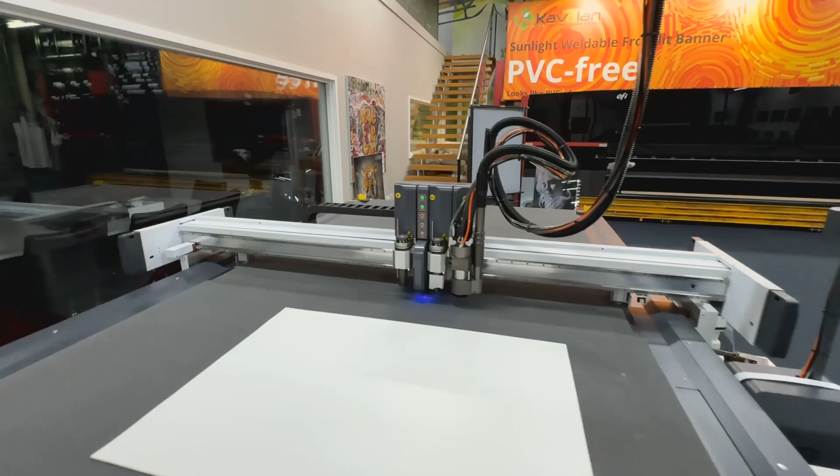So in this video we're going to run a cut job without registration marks using our UCT tool on our JWEI JCut Cutter. So the very first thing that I need to do is ensure that I have got my UCT tool in the K position, which I have. I've also identified that I've got the correct blade in there, which I've got the J311-1, and it's obviously sharp and it hasn't been broken or anything. I've identified as well that it is the correct blade for this type of material, and this is just like

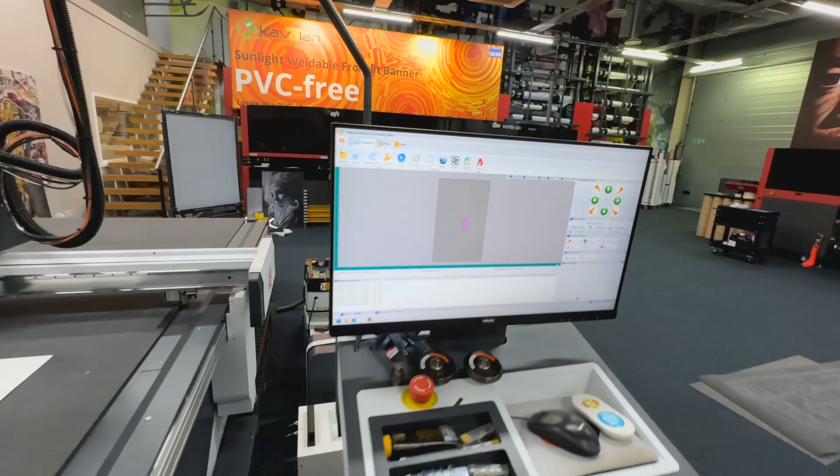a cardboard. Now the next thing I need to do is I need to do the tool depth on that tool, and I also need to do my vacuum zones. So I'm going to go into JWEI. I'm going to go down to the tool depth there. I'm going to ensure that I've got the correct tool. Now you'll see that I've only got knife and router, and that's because I currently also have a V-cut tool set up in position K1, and the V-cut tool does not use the automatic height detection pads on the table, so it doesn't give us the option for the tool height.

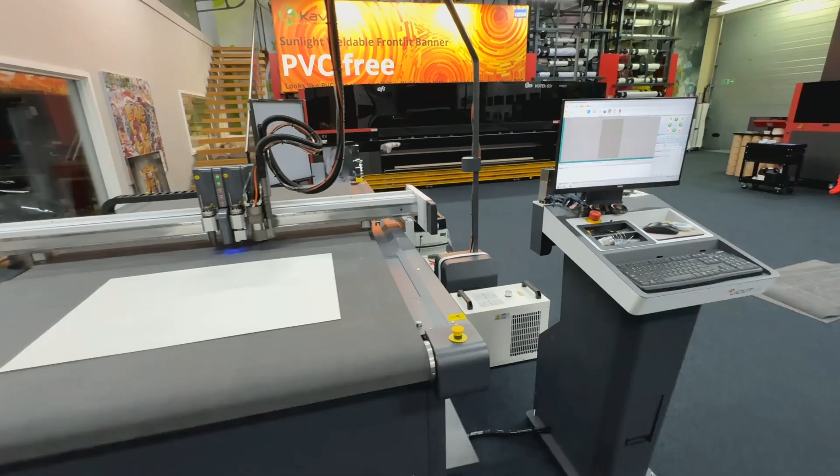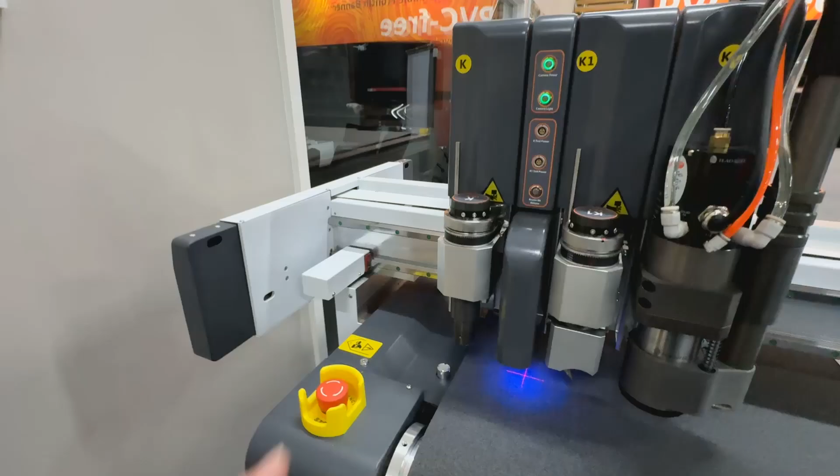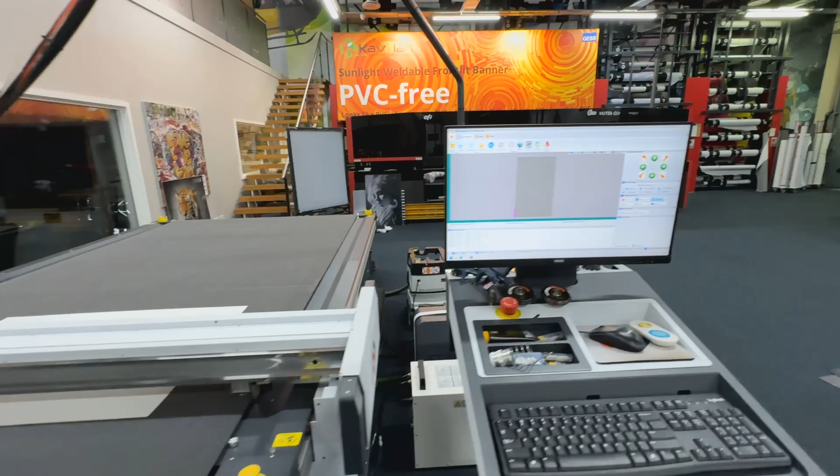So I'm going to click on tool depth button. That's then going to move my head over to the tool depth, and it's going to do the tool height for me. Now the K position will always do its tool depth on this one over here. It will not use that one. So K will always use this, K1 and K2, or the router will use this one. Now I've done that, I'm just going to move the head back again using the arrow keys.

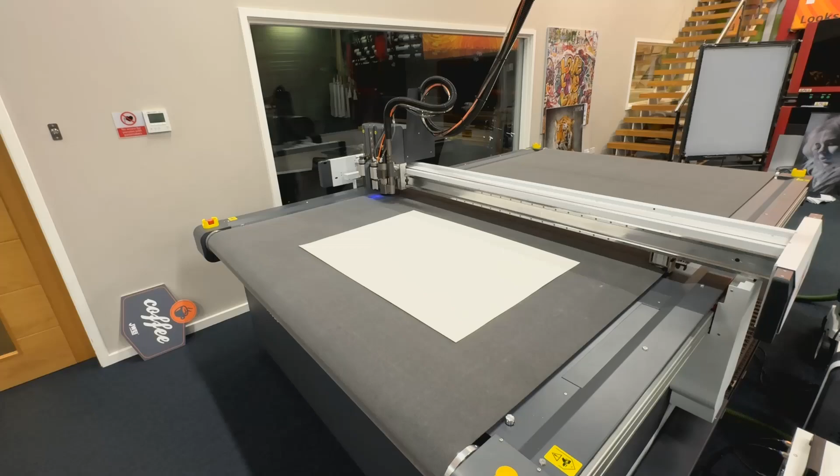Now I need to identify my suction zones. So at the moment, my material here is covering, or at least over, position 1, 2 and 3. Now these suction zones finish at the break of the table there. So that's where the two tables join. So for a job like this, that'll be absolutely fine. I'm going to have all three front positions open, and that will hold down this type of material, no problems. Now if I was routing, I might want to spin that around, so it's just utilising either the first one or the first two, and that means that you're going to get better suction on our job.

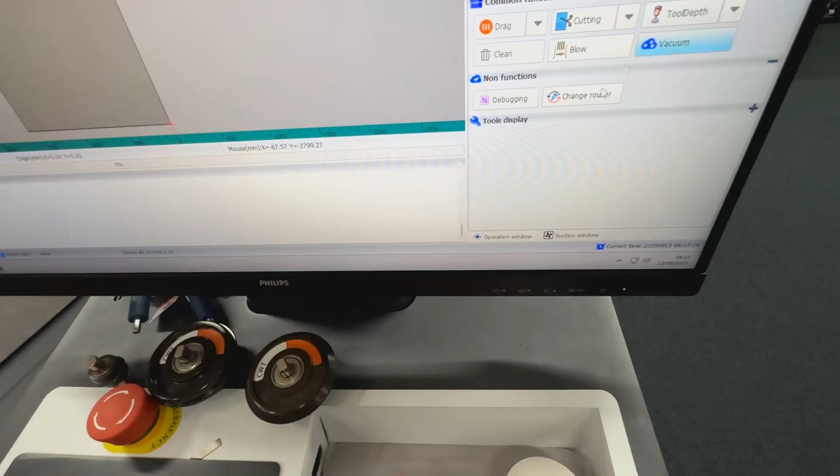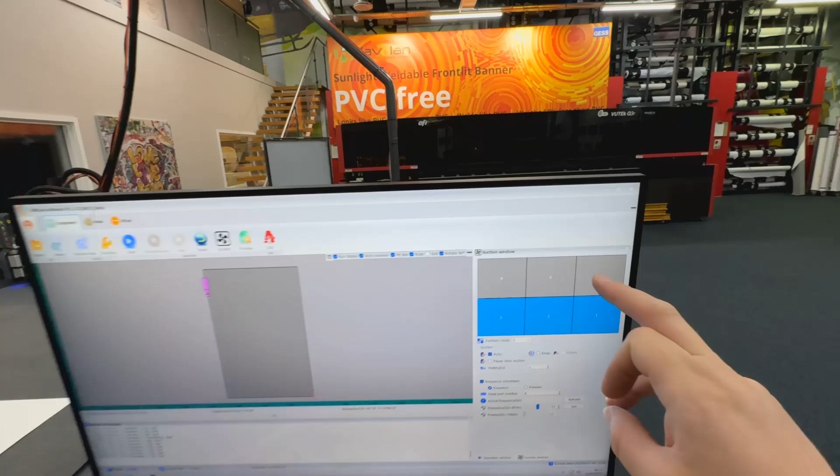So I need to tell JWEI that that's what I'm doing, so I'm going to go down to suction window, which is just here. I'm going to ensure then that these are correct. Now this is 1, 2 and 3, which as I said is 1, 2 and 3 on our table here, and then the back ones are 4, 5 and 6, which are 4, 5 and 6 at the back. Blue means on, grey means off, and I just need to click them like that. So this is correct currently, so that's good, I'm happy with that. I'm going to go back to operation window at the bottom.

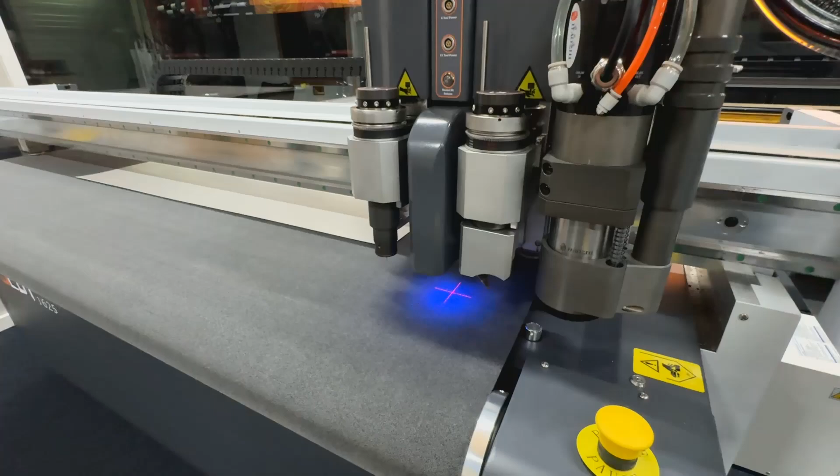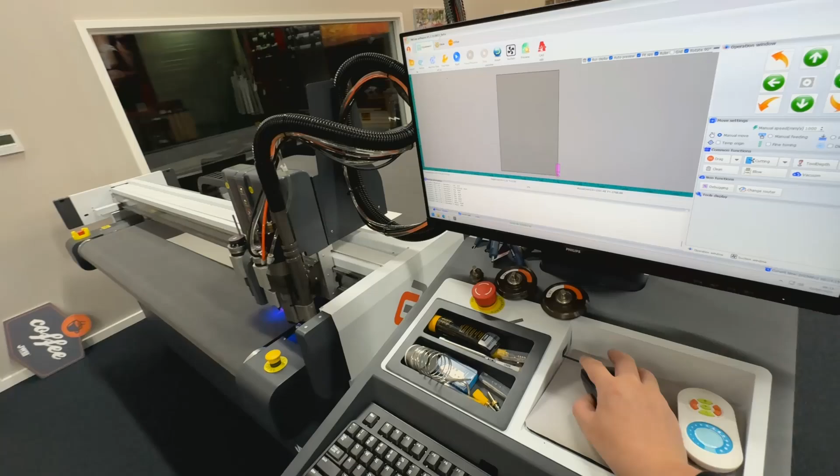Now I need to set a temporary origin to say where I'm going to start cutting from on my material. So easiest way of doing that is I like to use my orange arrow key, and that's going to fire the head over to the front without me having to hold down on the arrows. That also gives me my origin position. So that is the extreme corner of this table, so I cannot cut around this area or this area, it's only inside that cross. So using my arrow keys now, I'm going to move it across, I'm going to move it up, I'm going to get it onto my material just like that, where I'm happy to start cutting. And that's where I want to start cutting on this one.

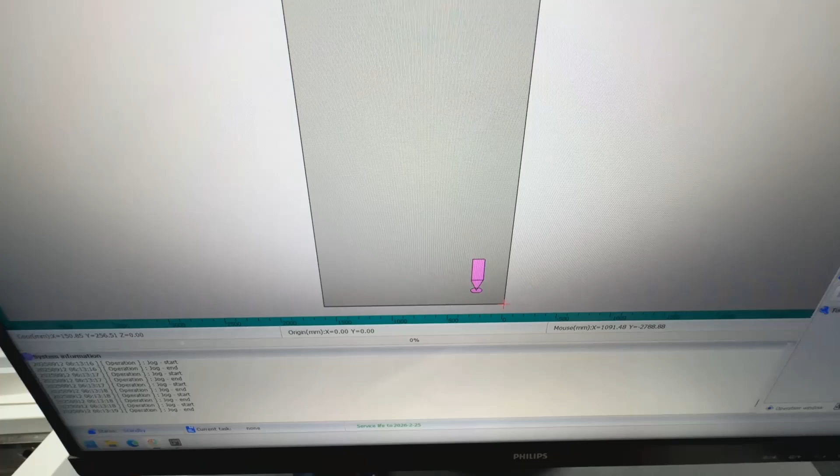So I'm then going to go to my temporary origin button, which is just here. I'm going to click that, and what that's going to do is it's going to move this laser point cross here to where my purple pencil is. So I'm going to click that. That's now underneath the purple pencil. I can see that because if I use my arrow keys to move it out of the way, there you go, you can see that there.

Now if I press my red button in the middle, which is now available, it will actually now snap the head straight back to that position on there. So I now know that my tool depth is done correctly, my suction zones are done correctly, and I have a temporary origin in position. So as far as JingWei is concerned, that's all done in there.

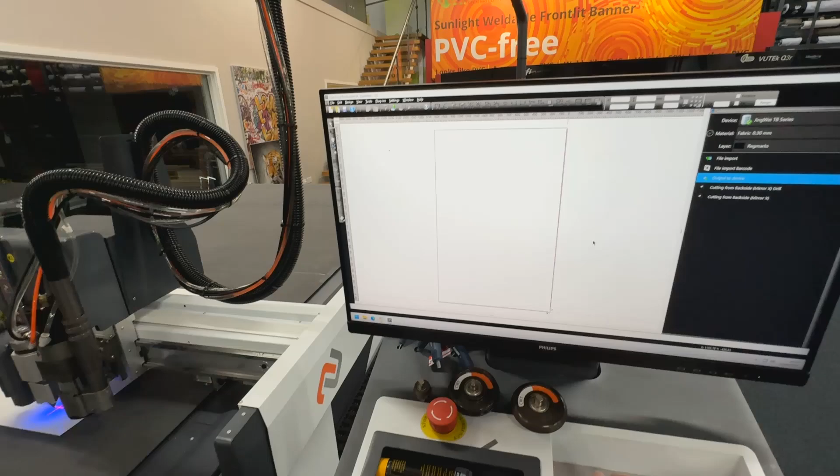So the next thing I need to do is go to my OptiScout. I now need to set up a job in OptiScout. So I'm going to go File Import, and I'm going to go to my desktop where I have my JingWei toolbox. I'm going to go Test Files, and then I'm just going to choose a Batman cut. Now I can see a little preview of it down there because I have the preview checked, so I'm going to press Open, and there we go.

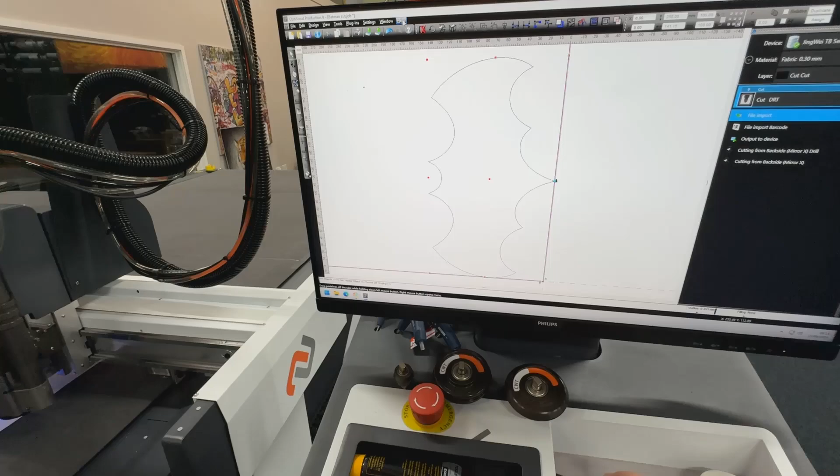Now what I'm going to do is just going to do a bit of a rotation on it so I know it's the right way around, and I'm going to zero the job by literally clicking it in the middle and then moving it around. Now, if you'd like to, you can also zero up here by just typing in 0, 0 and pressing enter.

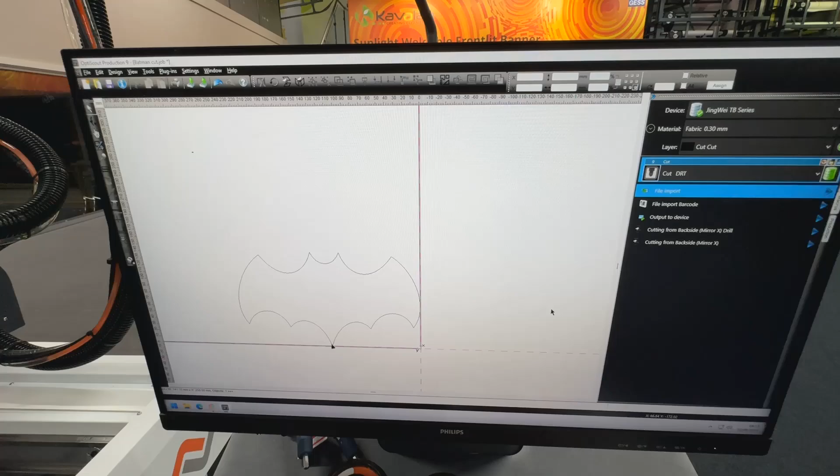So that's now set up as a cut file, but we haven't actually assigned any materials to it or done any settings. So we're going to go to our material library up here. Going to go to our little green tab, which opens up our full library. And then I'm going to navigate to Invercoat, which is what this material is. Click it once, press apply.

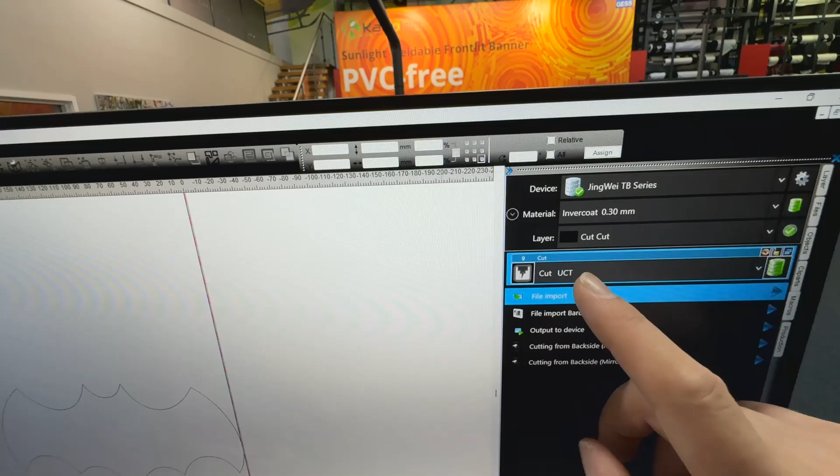That's now set up. Now you'll see it's automatically applied UCT to that cut layer, and that's because the UCT is locked or linked to the cut layer. So when we use the cut spot color, which this has on it, it's going to automatically link that UCT to it. Now if it hasn't, it will come up like this and it will say select method, which is fine because all we need to do is click there and go UCT and say that that is what we're going to cut this with.

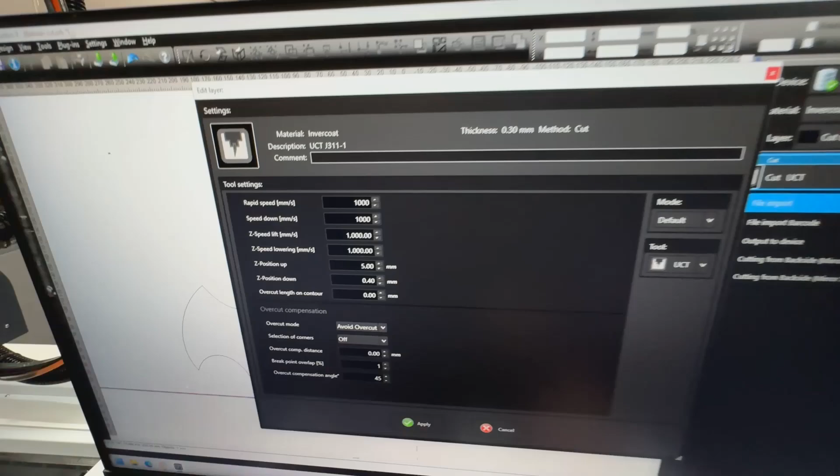Now I'm going to check my settings. So I'm going to go to edit. So I'm looking at what sort of speeds I've got. So this is fairly quick, a little bit too quick. So rapid speed is how fast it's going when it's not cutting. That's fine at 1,000. This is speed down. So this is how fast it's going when it is cutting. I'll probably say about 750 for this material. I'm going to update that as well and save it.

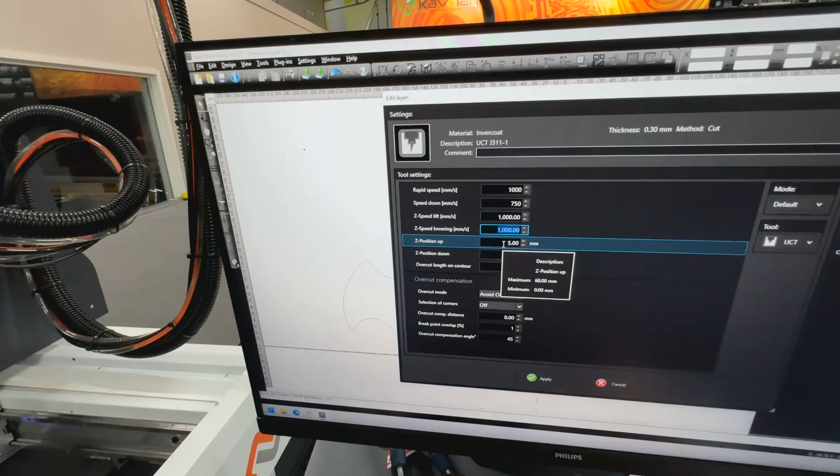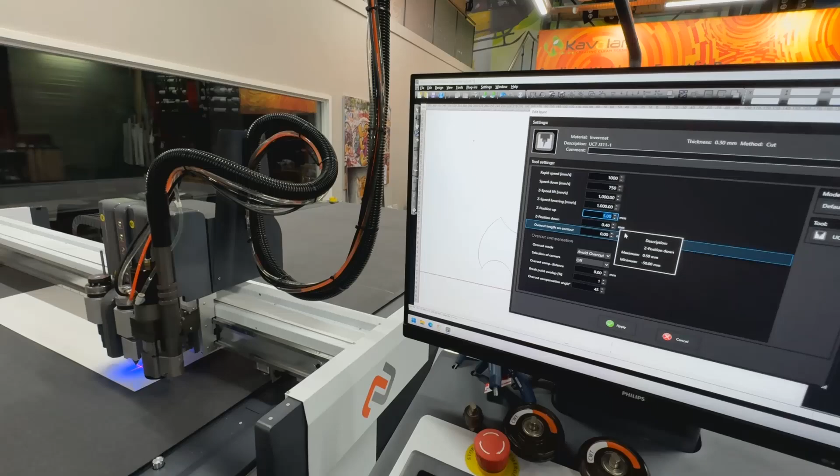Lift and lowering is how fast the tool comes up and down. So 1,000 is absolutely fine on this. Position up is how high the tool is going to sit when it's not cutting. So it's basically this position right now. So I don't want it to be all the way up there. I only want it to be 5 mil or a few mil above my material. But you've got to incorporate the material thickness in that. So if it's 10 mil material on the bed, you need to be doing it at 15 mil, for example.

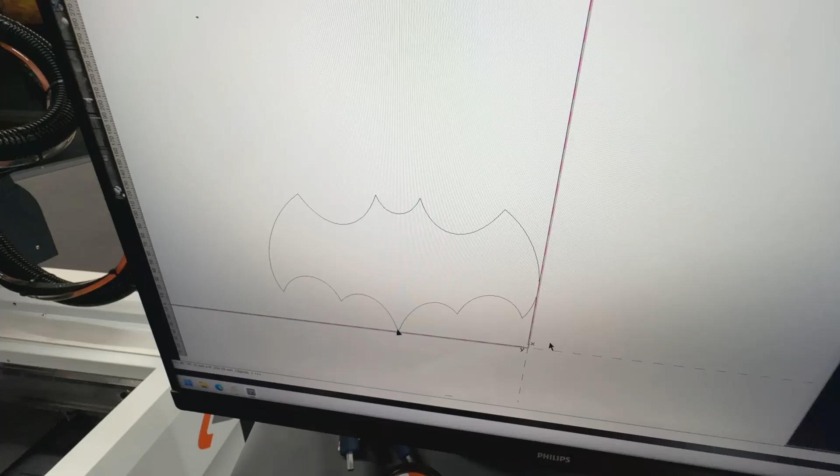Then we've got Z position down. Now this is added depth on our job. So I've got quite a lot on that at the moment. So I'm just going to put that at 0.2. I know that this material requires a little bit, so normally we start at 0 and then we work our way down. And then all of these ones are all about overcutting, which I don't need on this job. Going to press apply. That's now done, so now I need to output it.

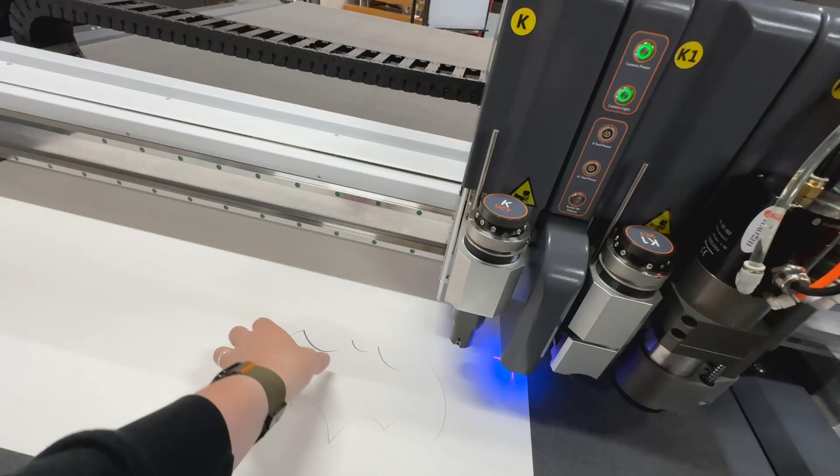So I'm going to go output to device, just there. And then settings in here, I'm going to check so everything looks okay in there at the moment. I'm going to press output. And that's now going to send our job to our cutting table. There we go. So you can see that's cut that out absolutely fine. And there you go. So that's how we cut a job without using registration marks on our JWEI JCut Cutter.